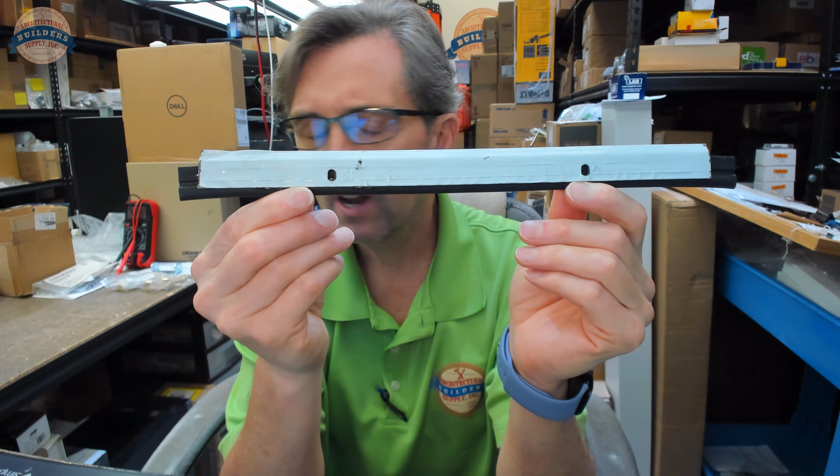This video is to bring you a closer look at the Pemko 319SSN. This is a piece of perimeter gasketing. It could also be an Astragal, I suppose. I wouldn't think of it as an Astragal at all, but it can be. But it would be most certainly perimeter gasketing is what it is.

This is a piece of stainless steel, very likely roll formed would be my guess, with a piece of neoprene bulb that's held on with a self-adhesive tape. This material has slotted holes for mechanical fastening, which will pierce through the upper shoulder area of the gasketing itself, allowing it to be mechanically fastened as well. And it's perimeter gasketing. Let's go over some basic dimensional properties, then we will talk about where you'd use it.

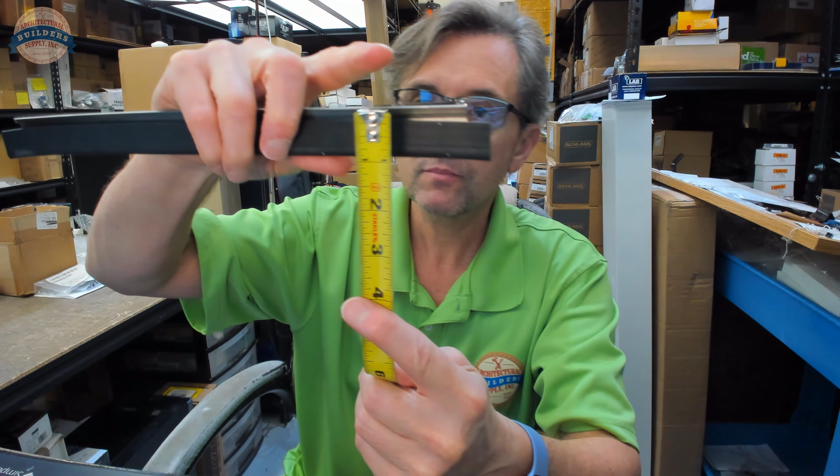Overall height with the insert is about 1 inch or so. You're going to have maybe 13/16 worth of stainless, and then the projection of that neoprene is going to be the balance, just a small amount. Overall projection from the face of the soffit is what I would call it. Going to be right at about 1/4 inch or so. Type 430 brushed stainless steel is what that is.

That is extremely magnetic. Doesn't mean it's not stainless. It means it's not passivated. Stainless, when it's been machined, picks up those properties of magnetism. I'm not an expert about it, but there are times when material needs to be sold as stainless but passivated as well, so it doesn't have that residual magnetism. I wouldn't call that residual magnetism at all. This material has been certainly worked several times.

So, what would you use this for? Let's talk about it right now. Well, it's perimeter gasketing, so you're going to use it anywhere where you need that type of material, but this specifically is certainly going to be used because of the base material itself. I wouldn't think you're at all going to install stainless material in an application that isn't a stainless steel opening, in the sense that if you have a stainless steel door and frame, or you have a fiberglass door and a fiberglass frame, or some non-ferrous application, you're not installing common weather stripping.

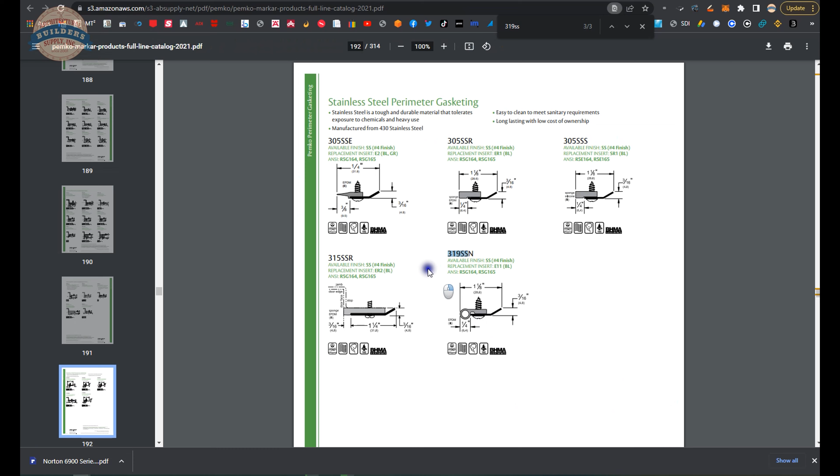Here's the material that we're looking at, and you'll note that the image we have here is either patently wrong or out of date. This is what it actually looks like in the catalog, and by the time you're seeing this video, it will have the proper image posted there. Stainless steel, number 4 finish, really important. If you need the replacement insert only, it's an E11BL. Okay, so you can search, you can order E11BL from us.

Oh, yeah, and there it is. Sold per foot, sold per length, whatever you need to have happen there. But that's what it's going to look like. Those are your dimensions. Air infiltration tested, smoke tested, fire rated. UL10, UL10C. Can you use it on a fire door? Yes, you can. That little symbol right there says you can.

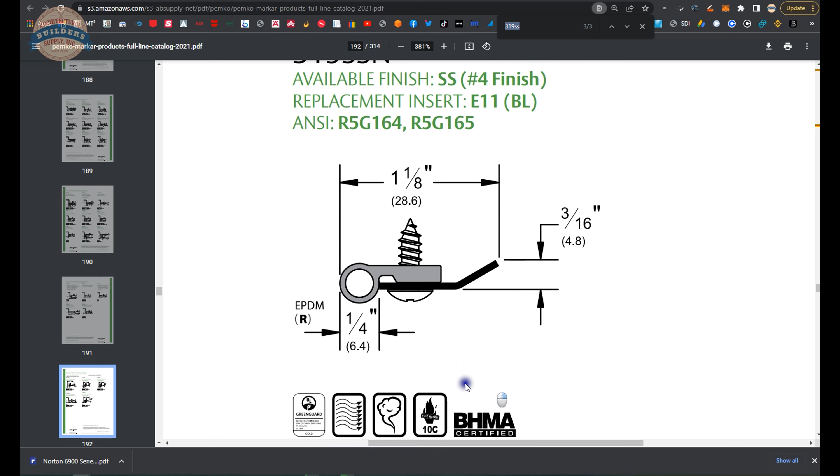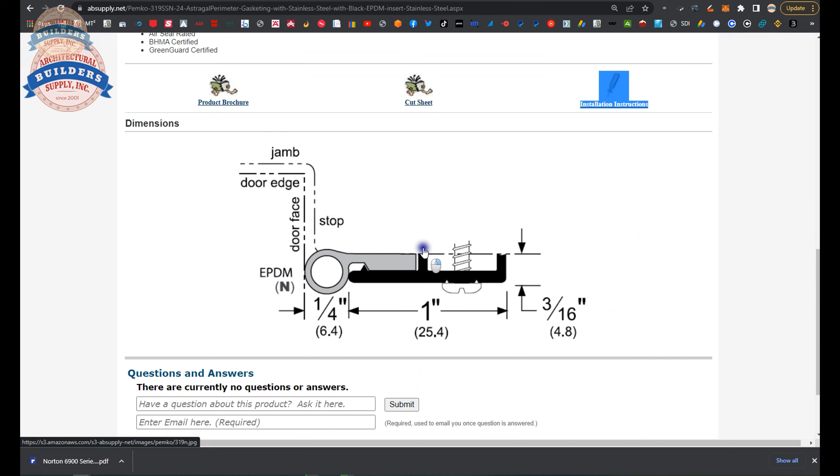Other stainless steel items are here as well. Now, where did this document come from? Well, below this video here is our extended description information, product brochure, cut sheet, installation instructions. The installation instructions are basically measure twice and cut once. That's pretty much what those say. You know, you're going to want to make sure that you don't impede the proper closing and latching of the door. Most absolutely if it's fire rated.

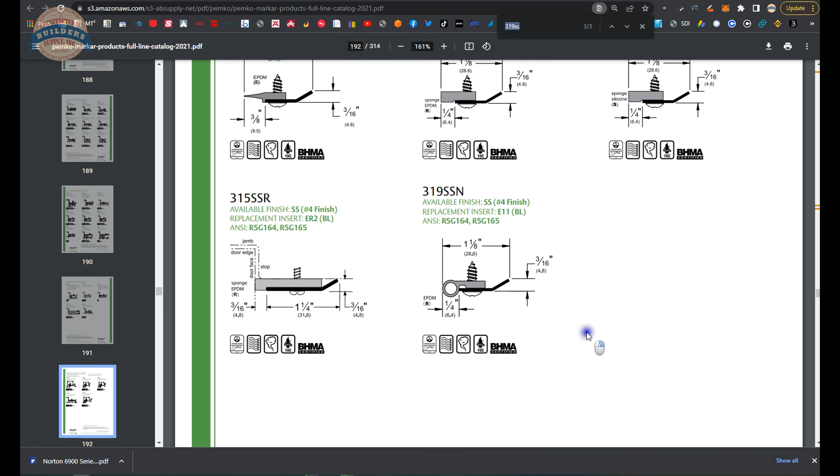Extended description, I'll leave that for you to read. Now, that page I was referring to comes from the link here to the manufacturer's page. When you click on that, you'll be able to get to this page, and from here is the full line catalog. When you click on that, you'll be able to do a find function on your keyboard for 319SS or 319SSN actually, and it will sooner or later search that and find it, and there it is.

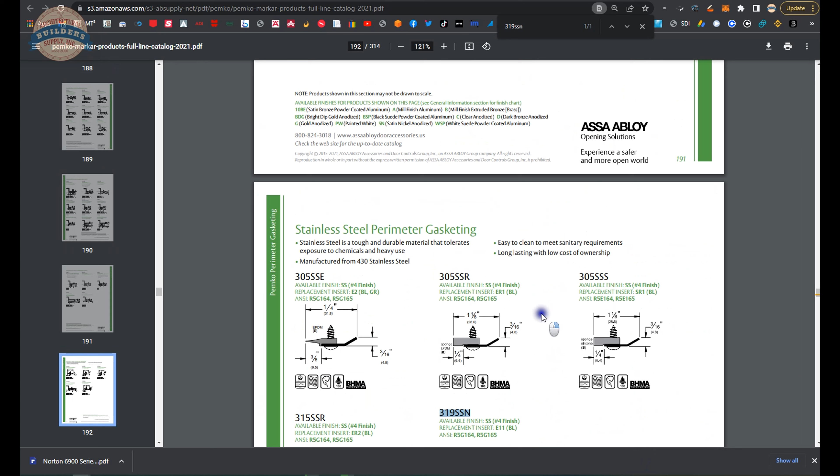Well, on that page are the other stainless steel perimeter gasketing items. Okay, and in that full line catalog you will be in the perimeter gasketing section, but of course you can scroll to the thresholds and door sweeps, door bottoms, things of that nature as well.

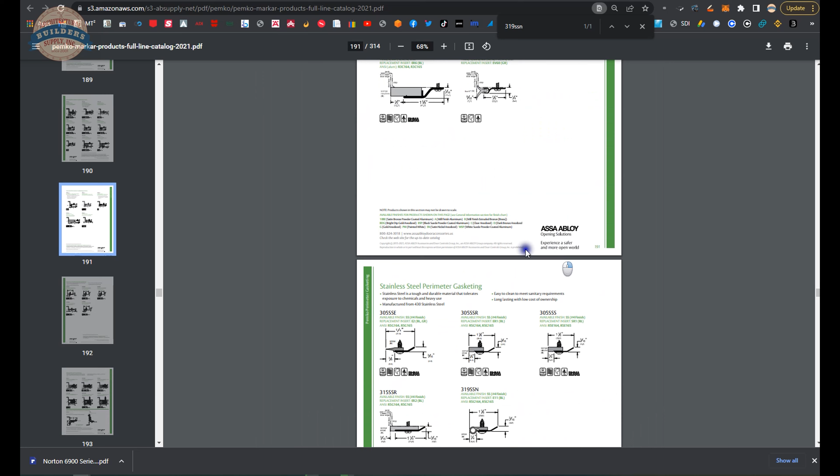This video was to provide you a closer look at the 319SSN. This is just a 12-inch sample piece for purposes of this video. The real equipment would include, obviously, fasteners. That is slotted there. That will allow you a small amount of lateral adjustment. That's always nice. You might need to loosen that screw up and pull it tighter or push it away ever so slightly from the face of the door.

Typical material. Gasketing is required in all instances on exterior doors. You want to keep your AC from going out. You want to keep the frigid air from coming in or losing your heat and the humidity within the space. You want to keep the critters out. Depending on where you live, Chicago is very different than New Mexico.

New Mexico gets hot and cold. Chicago gets hot and cold. Chicago has less scorpions than New Mexico. So your gasketing is really important. To keep the critters out, always check your boots before you put your foot in, I was told.